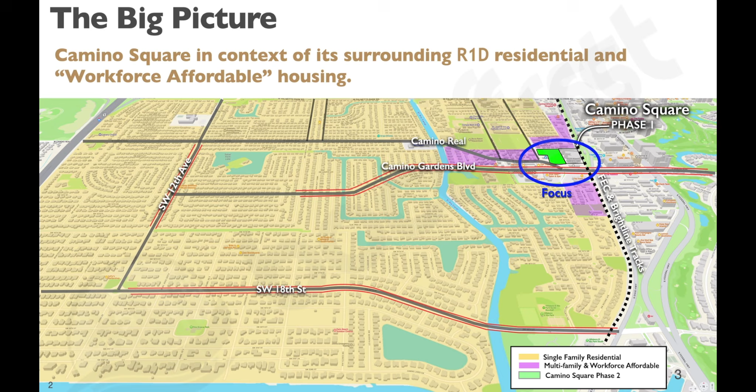Lastly, the train for FEC and Brightline presents quality of life issues for residents and affects how traffic is moved through this intersection effectively. Now, when I look at this property, having lived there since 1999, I'm familiar with the way it was back in the day and its 70s era design that put the retail in the wrong place, basically. But I also go through here and I view it perhaps differently than those who just look at it on satellite view and their GIS systems.

So if you're coming up on the left lane of Camino Real eastbound, this is the 300 feet of visual frontage with trees on the Camino property that could be modified so that they don't block any retail that's at that end of the property. And you can also see the leasing sign. The natural place to put the leasing sign is right there in this frontage area.

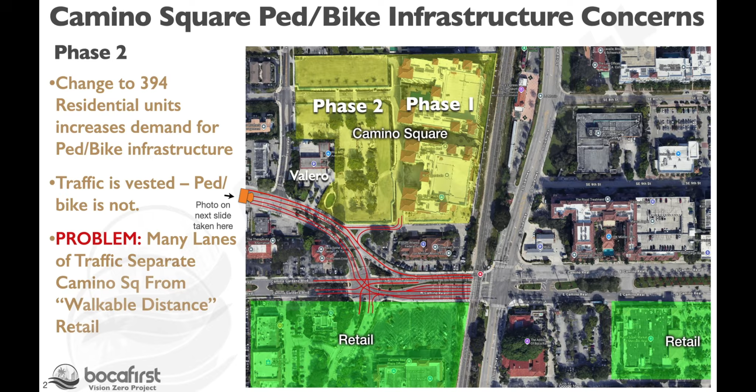Now, this is also a very walkable thing. Even in the hot Florida sun, it is a short walk between these two, if facilitated by the bike and pedestrian infrastructure. And I believe you'll see that what is there now is not good.

All right, so this is an occurrence that commuters and residents have to deal with. This is the reality of post phase one of Camino Square. A train going through the intersection will still back up the traffic past this light. It was worse before the change to the infrastructure.

So this is the case of a 5-minute FEC train. I was able to get through this light before I had to stop. But to the left is the Valero station and Southwest 3rd Avenue.

Interestingly, I went back, and all my times through this section, I have noticed that workforce commuters are frequently, if not close to 90% of the time, running counterflow on the north side of Camino Real. So this is back to the conversation about pedestrian and bike users don't behave like cars.

And in this case, there was a driver who was headed eastbound who chose to make a U-turn at the light, and because of the physics of his car, ended up on the sidewalk as I approached, which also blocked that pickup truck from making a right turn, and he wasn't too happy about that. But here we are, tra-la-laing along the sidewalk, and we hit another example of design that could be improved.

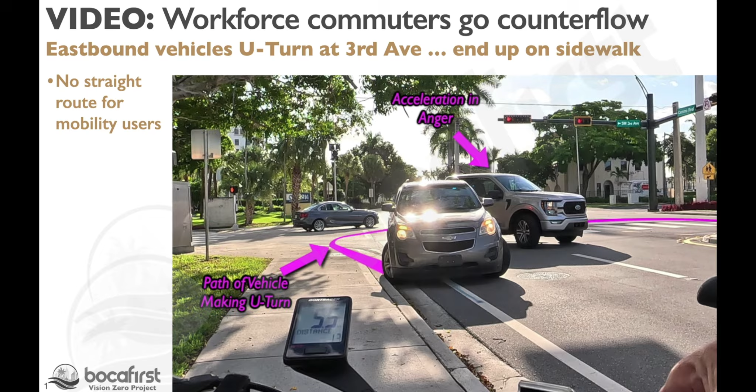So I have that ramp to get down to the street, but I can't continue on the sidewalk. I have to come over into where there might be cars lined up and become a pedestrian and work through those two hard turns to get back on the path, all the while at barely enough speed to maintain upright momentum.

Now, if we take a closer look at the infrastructure that's here, in yellow dotted lines is the only pedestrian bike route between Camino Square and the retail on the south. That's it. Otherwise, you're on the street. It's a 6-foot sidewalk all the way, everywhere. And in order to get from Camino Square across Camino Real, you have to navigate 5 crosswalks. Only 2 of those crosswalks are signalized.

And then the one that isn't signalized is in fact a high-speed right turn lane where cars tend to start accelerating in order to continue their journey westbound, right there in the curve. Then, compounding things a little bit further, the bike lane that's there is a keyhole because the bike lane has to go straight through this.

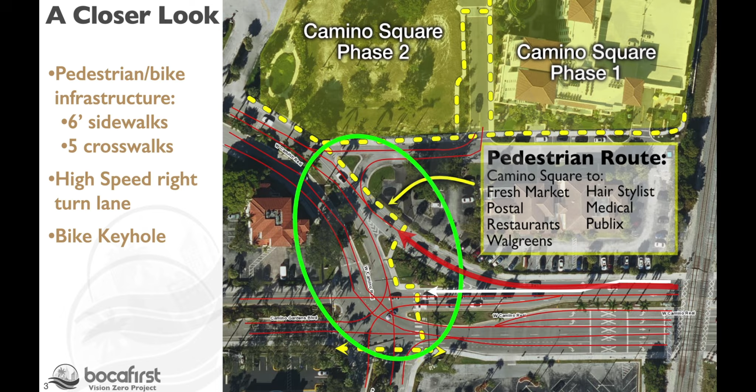And so you have cars wanting to get into that high-speed right turn lane being cut off by cyclists who have to cross over that lane to stay in the bike lane. And then you have cars merging in as well, which you'll see in a moment. All right, so let's look at the pedestrian crosswalks there. This is a video that shows navigating from the Camino Square project to the other side of Camino Real.

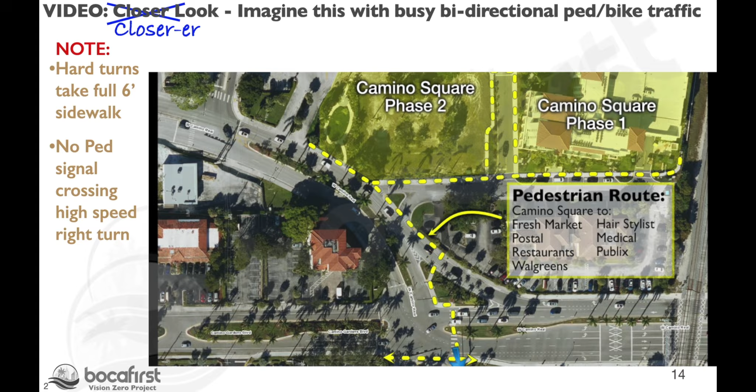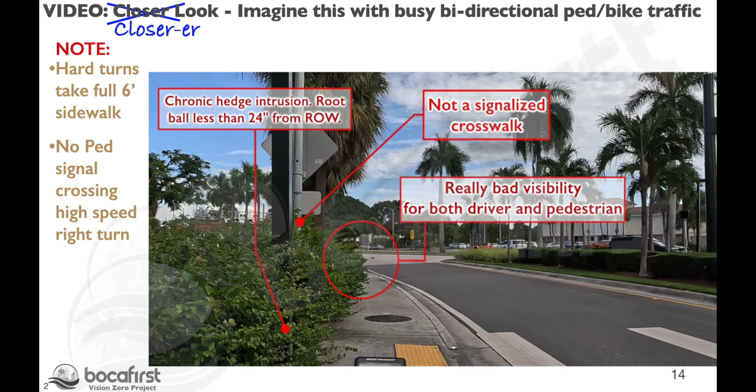These hard right turns are such that you really have to consume the entire 6-foot sidewalk in a bike. So there's crosswalk 1, up and down and up. Crosswalk 2. That fresh market worker is going the same route that I'm going, and you can see how he just appears out of nowhere. And that's because of this chronic hedge intrusion problem. That's probably 3 weeks of growth on that hedge.

This crosswalk here is not signalized. It's a dash and pray. If you just think about a mom, dog, and a stroller trying to do that. But here I am in a bike navigating all these hard right turns, and this is a chute straight across. You can see the curbs on both sides. There's no room for a couple people to pass and go different ways.

So an immediate problem that could be addressed here is this issue of the dash and pray crosswalk and the design of this hedge. Even if it's trimmed back, it's only going to get trimmed back to the edge of the sidewalk. And then every week that it grows, it's intruding more and more. And pedestrians and cyclists are losing what little there is of space there.

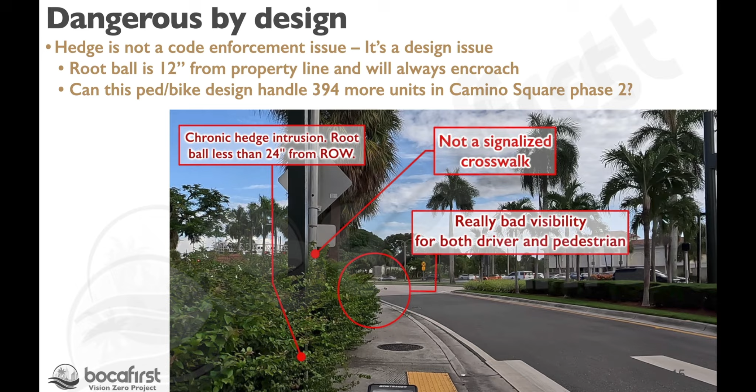And if you are a cyclist, you know that a 6-foot sidewalk is really the bare minimum for 2 bikes to pass. Now compound this with lots more joggers and pedestrians and cyclists and shoppers. This is a recipe for an unwalkable section of the CRA.

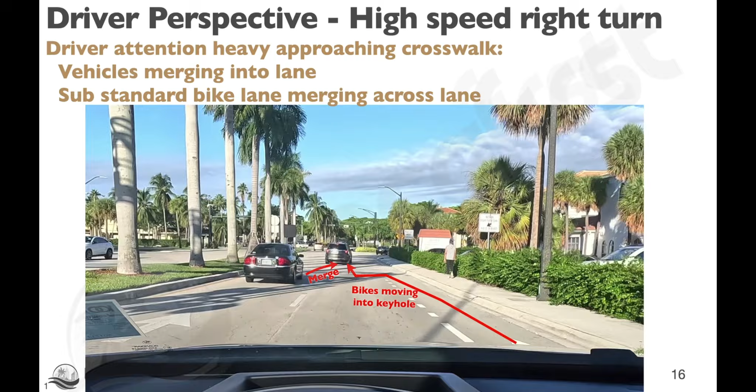This is the driver's view of that same intersection, where drivers deal with bikes moving across because of the bike lane keyhole there to go straight, and then cars merging in from the left lane. So I stopped it here. You can see the pedestrian sign there popping out from behind the trees. This is the first spot that, as a driver, you can see someone making the move to go across there.

And there's a similar visibility problem looking the other way. I measured this out to be about 110 feet based on the hedge. And compounding on top of all this is just the traffic load at commuting time at night.

Drivers are often waiting multiple cycles of the light on Dixie Highway to turn right and get here, and they're then dealing with the merging traffic and finally getting clear to speed up in this turn when there's this dash and pray sidewalk there. All right, so I want to now move into some starting points for what I think could be done to this intersection.

So the core of my idea is to redo this pedestrian bike infrastructure around the concept of a bidirectional spine. Right, so this is infrastructure that will handle groups of people passing each other. Think mom, dog, stroller, or pushing a cart, or e-bikes that are a little bit less maneuverable and have more weight behind their momentum, turning radius, and all that. We need to straighten this out and not have all those hard turns.

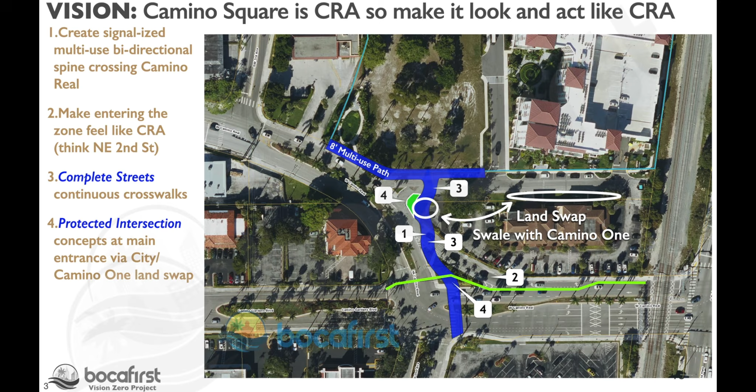And then the next thing I did was to pull in some concepts from protected intersections where you do what you can in conflict areas to separate the kinds of traffic. And so I've put a bump out there to sharpen the turn into the Camino Square area, which will slow things down in preparation for going across the continuous sidewalk, and then bringing the bike lane into a different area in the westbound direction.

So taking all that and rendering it into a visual for you is something like this, where we can use pavers to help bring that look and feel of the CRA into this area, use continuous crosswalks in those two spots, and where there's a yellow marker there, that's actually where the sidewalk level grade would drop down to the grade of the street. And so there's way fewer of those. The whole thing is straightened out. It looks and feels like CRA.

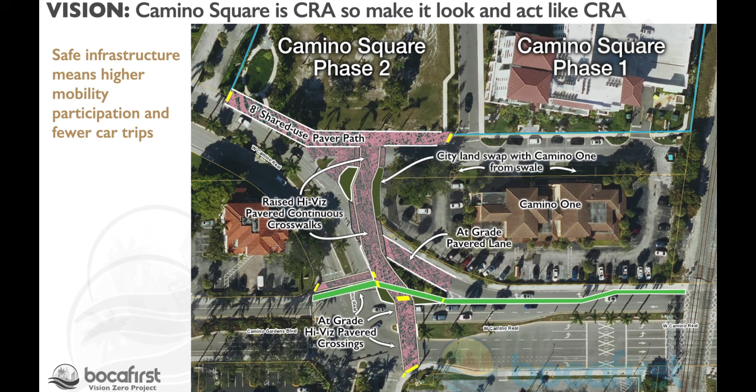It's going to help us enable the kind of participation I think we want. It's going to help enable the quality of life for Camino Square residents, and hopefully make whatever retail that's in there accessible to those not just who are living there, but also to the surrounding areas of residential.

So to recap, while the traffic infrastructure may be vested for Camino Square, I question whether the pedestrian and bike is, especially in the context of 2025. We're now a Vision Zero city. We have a complete streets ordinance. Go there, look at that 6-foot sidewalk, and ask yourself, is this a complete street environment for our residents?

The hedge itself, from an immediate point of view, could in fact be declared unsafe by the city manager. And then we owe it to ourselves to get ahead of this in the Vision Zero philosophy of recognizing there will be mistakes and to create infrastructure that will still be safe in spite of mistakes being made.

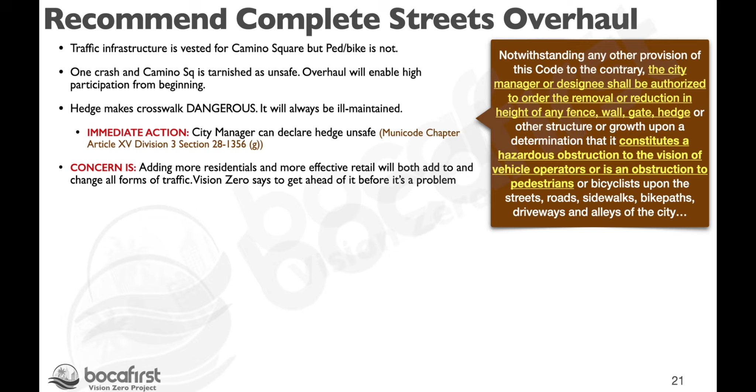And then as you look at alternatives, I would ask you to consider it is 2025. It is not 2018. We're not there anymore, and e-bikes are something that we can really benefit from in our city if we do our jobs on this pedestrian infrastructure. And the way to think about it is not just one person walking or riding through, but something more like I've shown you here that has a longer turn radius, heavier weight, but yet is keeping a car off the road, especially in the context of Camino Square having young families, one-car families. This is a way to enable the success of Camino Square as a project.

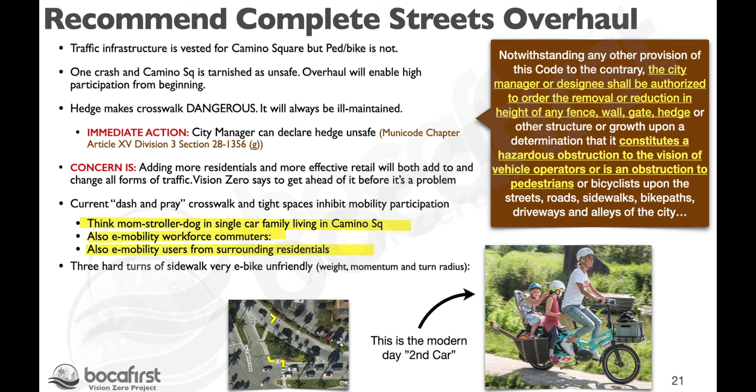And of course, the last hard turns of this infrastructure, straighten this out and widen it. And that is the essence of the spine, and that is the essence of the solution that I've put forth here. Straightening it out, widening it out, making it safe. That's what will facilitate high participation. That's what will facilitate, I believe, success of retail and residential in the Camino Square Phase 2 on behalf of the future residents of Camino Square, but also on behalf of the existing thousands of residents that live, work, and play around this area.